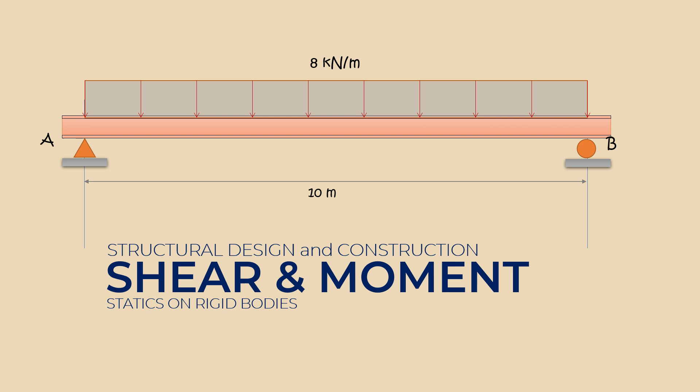Good day. So, nandito na naman tayo sa ating panibagong topic about the shear and moment on the statics of rigid bodies. So, if you take the board exam, you see this under PSAD or the structural design and construction. Okay, so this time we will be having distributed loads. The distribution of loads is 8 kilonewton per meter and the span is 10 meters. So we have the hinge support and the roller support at both ends. So solve natin ito kung paano natin isosolve itong problem na ito.

So the question is, what are the values of shear and moment at X from A? This is from A, ibig sabihin yan. This is X, 7 meters from this edge or from A. Determine the maximum bending moment, or the moment maximum. So, i-analyze natin, ibig sabihin, dalawa yung moment na hinahanap: the moment at X equal to 7 meters and the maximum moment. Ibig sabihin, hindi pa tayo sure kung yung moment na makukuha natin at 7 meters is the maximum moment. So, solve natin kung paano ito.

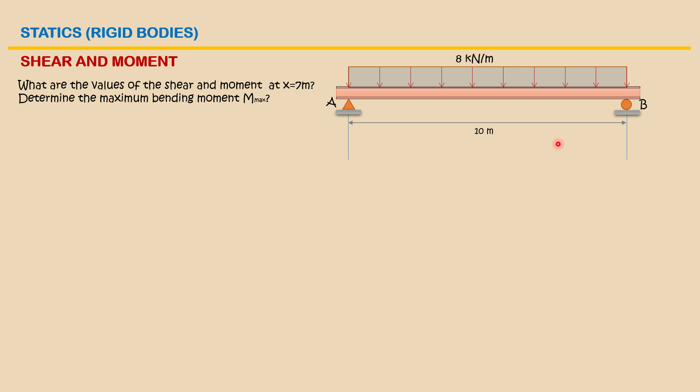Okay, so meron tayong structure. This is the distributed load, 8 kilonewton per meter. And of course, we will be having a support here or the reaction. We have the RA and RB. So take the moment at A is equal to 0. Ibig sabihin, magmo-moment tayo dito. So we have 10 RB kasi magro-rotate tayo ng ganyan. For example, rotation natin is ganito. So we have RB, negative sign. Ilalagay ko na lang dito sa side na ito. Tapos yung 8 times 10.

Kasi dapat makuha muna natin, itong 8 times 10 is equal to the area of this portion, para makuha natin yung resultant force nito. So, to cancel out, this would be 80 kilonewton. Kilonewton na lang kasi 8 times 10 meters, makakancel yung meters, so magiging kilonewton na lang. Ibig sabihin, magiging single load na lang siya. So, para ma-convert natin itong distributed load into a single load, kukunin natin yung kanyang area. So, this would be the area.

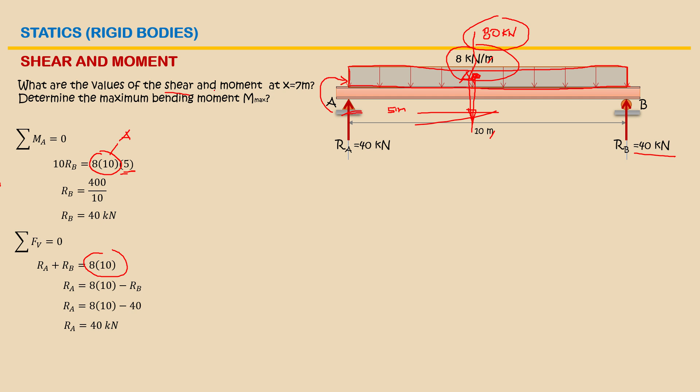And summation of forces naman tayo vertical. The summation of forces vertical: RA plus RB is equal to 8 times 10, yung 80 kilonewton. So, we have RA is equal to 40 kilonewton also. Madali natin masasabi na 40 kilonewton kasi simply supported, dalawa lang yung supports, tsaka symmetric naman yung loadings natin. Uniformly distributed naman yung load natin. So, yun yung pagkuha natin ng reaction. Kaya lang the question is the shear and the moment. Paano natin isosolve itong moment or shear?

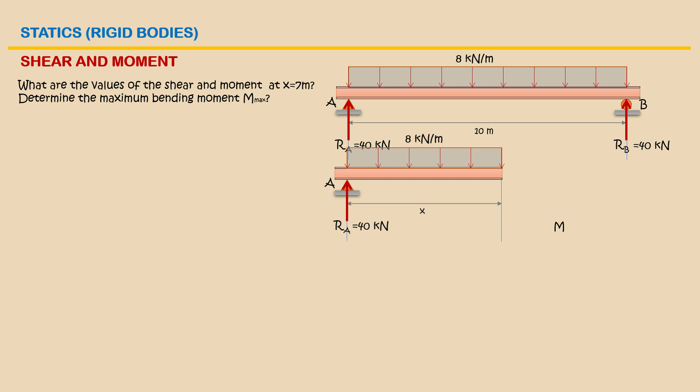So lagay natin dito. Cut natin yung section niya. Once na kinat natin yung section, kinat natin siya dito. Nakakat yung section natin at this distance x. Ito yung magiging distance niya. Ikakat natin ito at a distance x. Ibig sabihin variable, hindi unknown. Once nakikinat natin yan, magkakaroon tayo dito ng shear force.

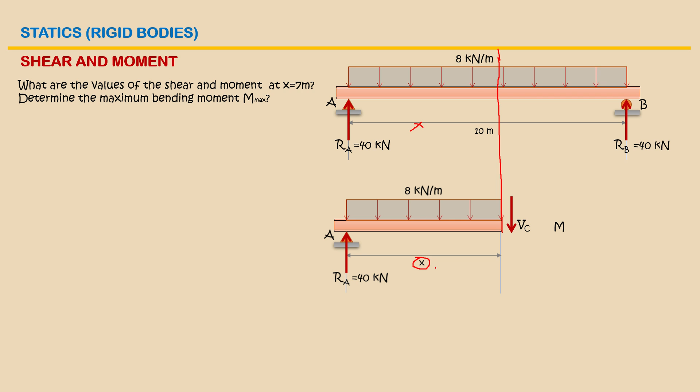Para makuha yung shear force na yan, gagamitin lang natin yung summation of forces vertical. Ito na yung figure na i-consider natin, hindi na yung sa taas. So, the summation of forces is equal to the RA. Yung RA is pataas. Tapos itong 8 times x, kasi magiging area din yan, area nito.